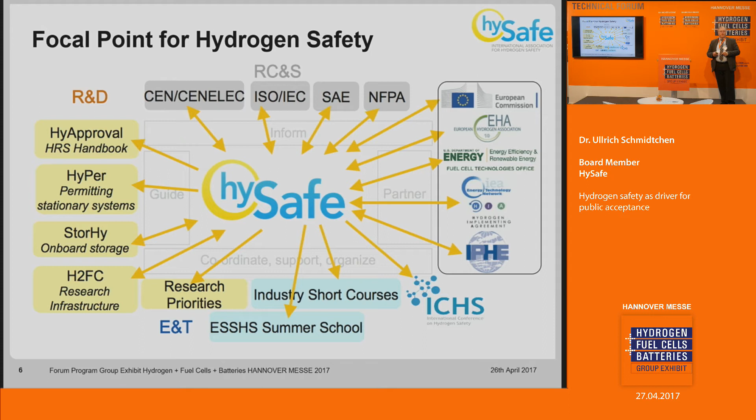How do we do this? Mainly by doing PR and dissemination. We have a conference every other year, the ICHS, International Conference on Hydrogen Safety. We are also doing workshops on research priorities and short courses, training, and so on. We have a database on hydrogen incidents and accidents, a website, and newsletters.

Every other year we have our big conference, and in the years between we have a research priorities workshop. There we call in the leading experts on hydrogen safety from the world, and we discuss the matter - where are the points where we know too little about hydrogen safety, which are the fields where we need more research, and how can we organize this.

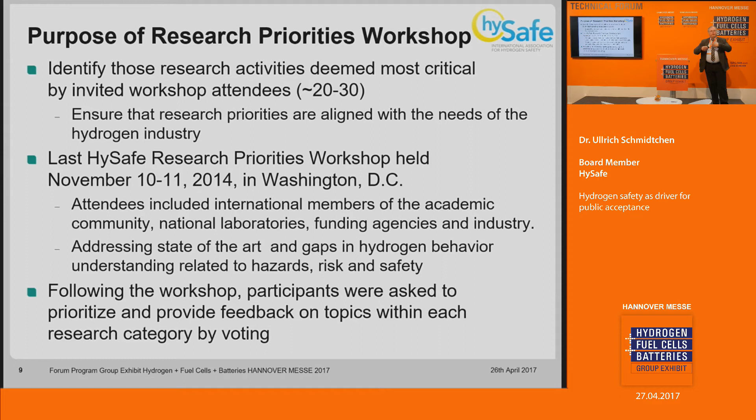The other thing is the ICHS conference. If you want to know anything about hydrogen safety, that is the place for you to go. It is the only event in the world focused on hydrogen safety. The conference takes 3 days, we usually have 3 parallel sessions plus a few plenary sessions. This is something unique in the world in this form.

We do not depend on any political or business organizations, but of course we have sponsors, and we have a lot of partners which help us to keep this thing going.

You can see the pattern starting from 2005 - we had the conferences in the uneven years, and the research priority workshop in the even years. These were the last. I hope I will see all of you in Hamburg in September, because the next conference will be held there. For most of you it's not a long trip, at least if you are from Germany - not all of you are, but okay, I will check whether everybody is there, okay?

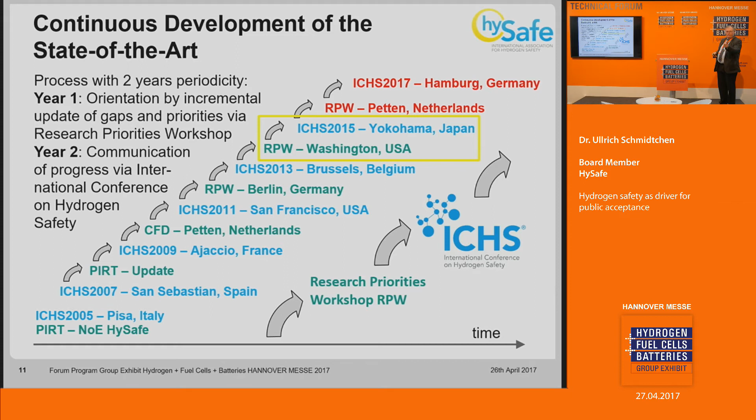Where are we today? Which are the current research priorities? Well, I could discuss this with you for a few hours, but I can't - they will kick me away from here. If you really want to know it, you should look up our website, and look up the report which was published in 2015.

These are the results of the workshop which was held in 2014. This was published with the kind support of the Sandia National Laboratories in the USA. If you want to know which are the fields where the experts say here we need more activities to be done - there are quite a number of them, but the most important are QRA tools, quantitative risk assessment.

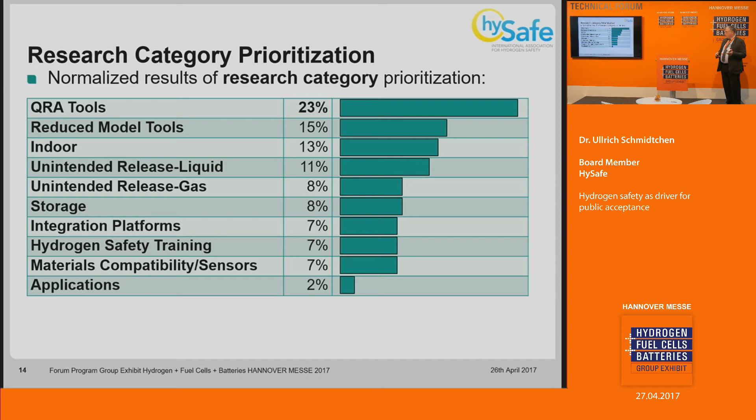Technically handling hydrogen safety is well known how to do it, but you would also like to know by calculation, for example, how long will this cylinder still be intact, and should I replace it or shouldn't I? This is a clear leader among the experts. So we need user-friendly and industry-focused software tools to make it possible for the user to make the decision - can I continue as I did before, or should I switch to something else, or replace a component, or what else shall I do?

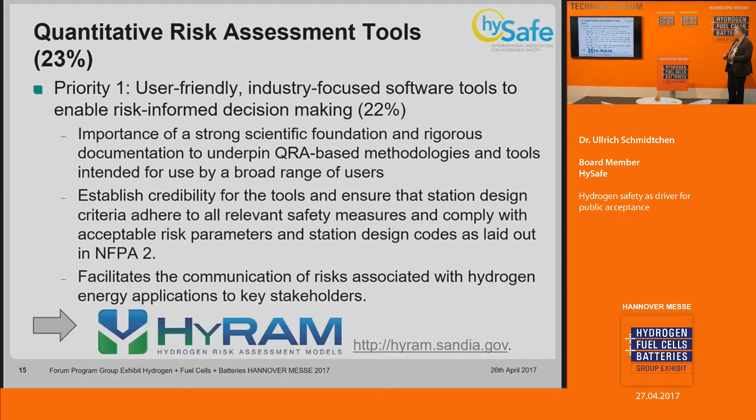There is also a specialized page on the website of the Sandia National Laboratories, which is dealing with these topics.

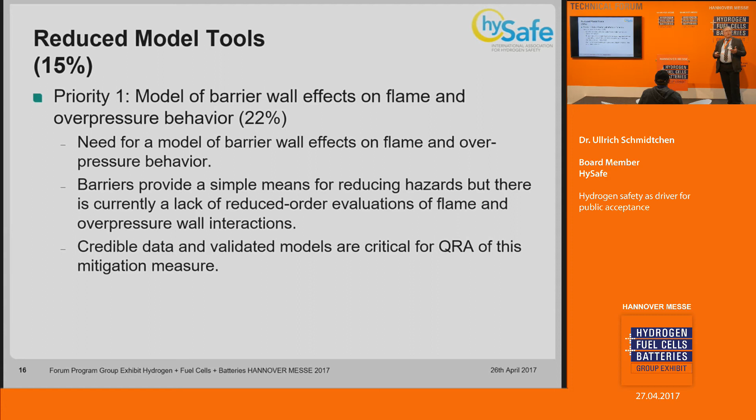Another point is reduced model tools. This has to do with the calculation of the dispersion of hydrogen, in particular when you have wall effects, other barriers, and overpressure. This can make the whole estimation of what will happen quite difficult. So this is another point where we need models which are easy to use and allow a quick estimation of what will happen in a given situation.

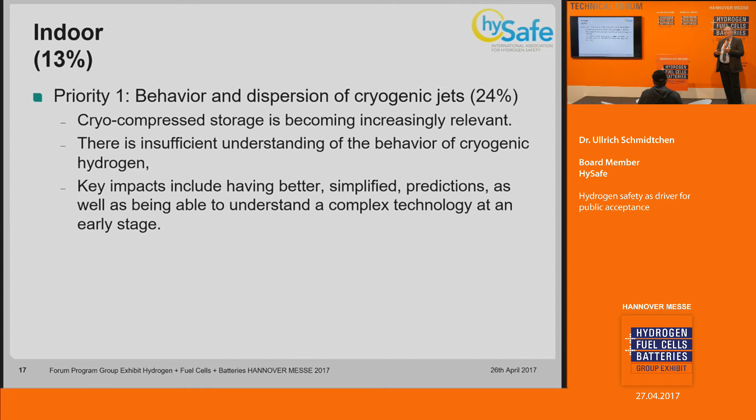Dispersion is not quite easy to handle anyway. It's particularly difficult in indoor situations when the space available is limited. Here in particular, the behavior of cryogenic jets must be considered in more detail, because cryogenic jets have a strong tendency to expand, and this in an indoor situation may raise questions which are not so easy to answer.

This is closely related to another point: unintended release of liquids. Here you have not just the dispersion of the gas, but also the evaporation of the liquids. These two processes are coupled, but sometimes it's difficult to estimate what will happen. For example, where does the heat for the evaporation come from? Does it come from the ground, or from the atmosphere? This makes a big difference.

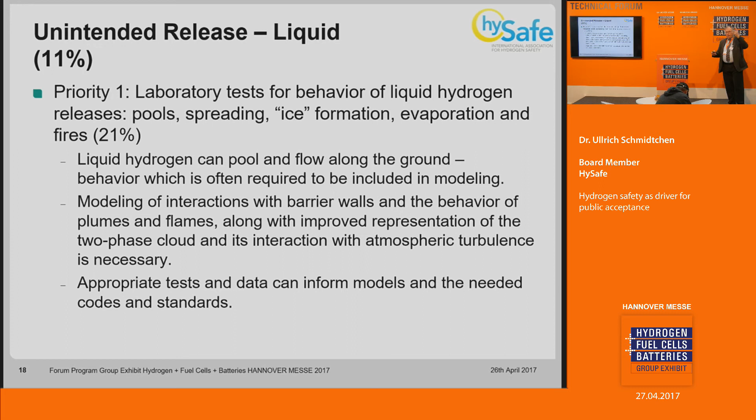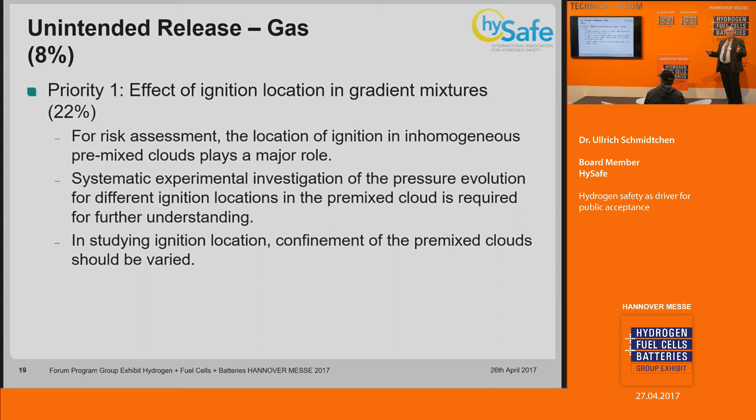There are enough questions to be answered as well on the unintended release of gas, and to answer the question of where is the area in which an ignition is possible.

Storage. What about the pressure relief devices for a hydrogen storage tank? Which diameter should it have? And what else can we do to protect a tank?

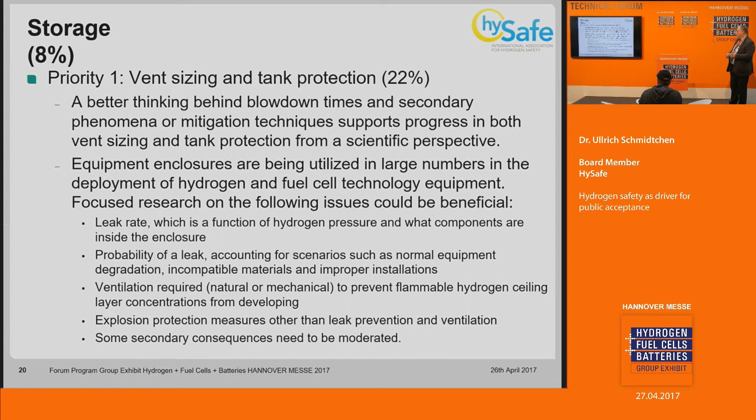Integration platforms - this is rather a matter of organization, not so much of technology, but these are tools to bring people together so that a wider class of stakeholders, not only the scientists, can be involved in the development of hydrogen infrastructure. There was a particular project in the European Union called Susana to care for this.

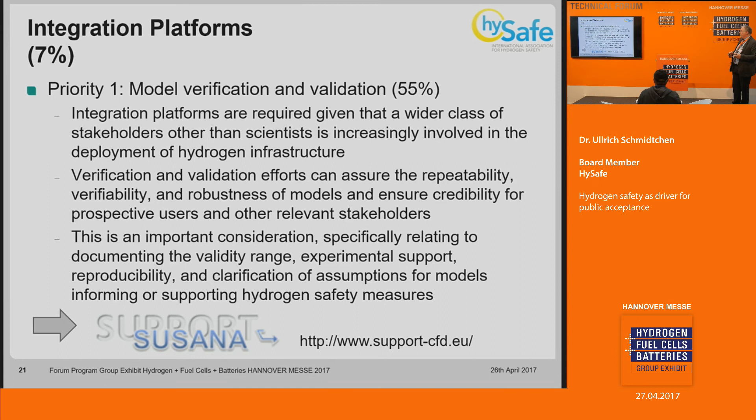Hydrogen safety training - of course experts may not need much training, but there are people like, for example, from the fire service or the police who come in first when there is an emergency. They should have some knowledge available on what to do and what not to do.

There was also a European project, HyResponse, which was particularly targeted to fire services and similar institutions, and this was finished last year. This project gained very valuable results about guides or helps for firefighters on what to do in a hydrogen accident situation.

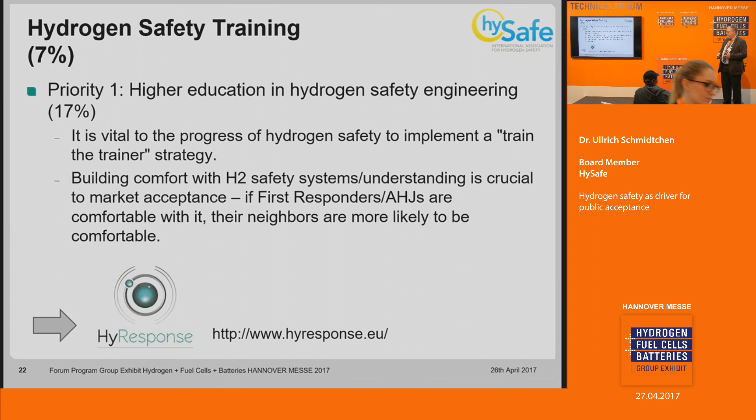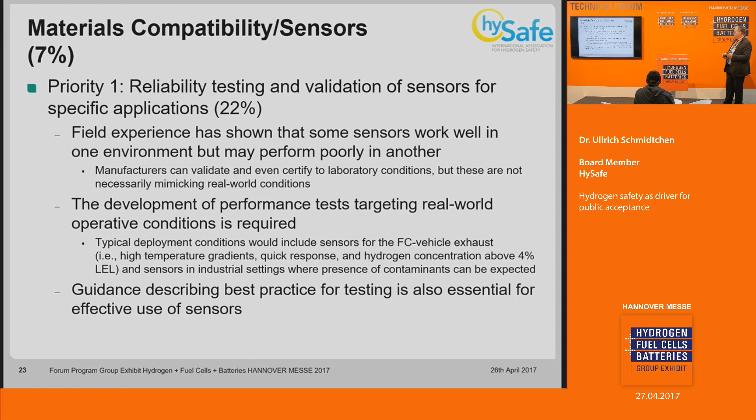Materials compatibility - what to do to avoid hydrogen embrittlement is always an important topic. Closely related to this are sensors. And then, of course, there are applications like, for example, vehicle tank protection.

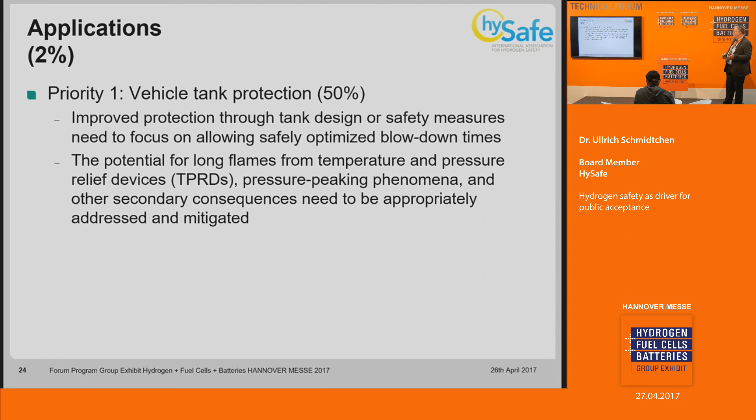All this is very interesting, but as I mentioned already, the clear leader of this ranking are the QRA tools. This is a topic where a lot of things are already happening and great progress has been made, but we need more progress in this field in order to make hydrogen safe not only for the experts, but also for general people from the industry or from the public to handle hydrogen safety.